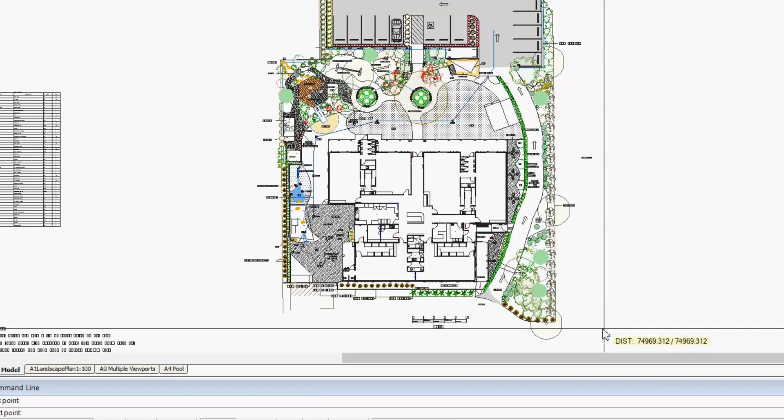I can use a tool called the distance tool, and in this case I can click at the top and come down towards the bottom here, and the cursor reads 74969. We work in the metric system in millimetres, so I have to shift a decimal point to say that's 75 metres, and in the imperial system we work with decimal feet. But everything's full size in the dimensions that people understand when constructing the landscape design, which in this case spreads all the way around the actual building.

So we're in what's called model space. In order to present the design to the client, we switch to another space, and these spaces are labelled on tabs at the bottom of the screen. They're called layout spaces, and you create them by going to Format and Layouts here.

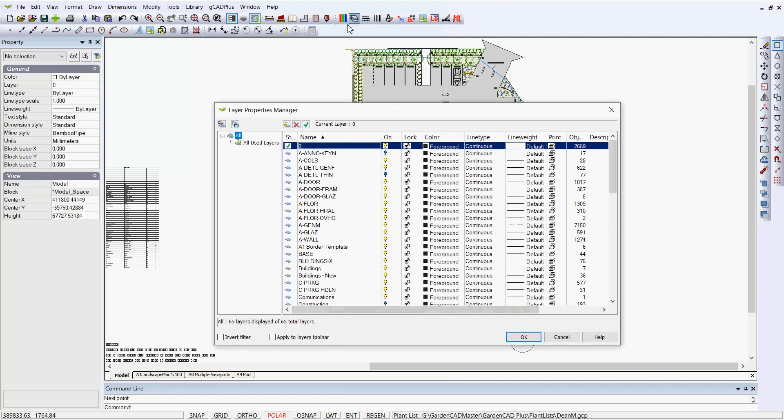We can also use lots of layers in the drawing. If I click on this little icon here, that shows you the list of layers. Various parts of the building, probably done by an architect, are on different layers.

Let's switch to what the client might see when you present this design. So I can go to a Layout tab I've labelled A0 multiple viewports. And here we are. This is more like the sort of thing you would present to the client.

So you do 90% or more of the work in that model space, but then you switch to a layout space to present your design to the client. Not only can we see, as we do here in the central zone, the design that we've just been working on in model space, we can also include images in this space just to indicate the type of species that are going to be used in the design.

Both in model space and in layout space, I can zoom in and out on the design using the wheel of the mouse. I can right-click and pick options like Zoom Extents or Zoom Previous. Let's Zoom Extents, and that takes me out and shows me the whole page.

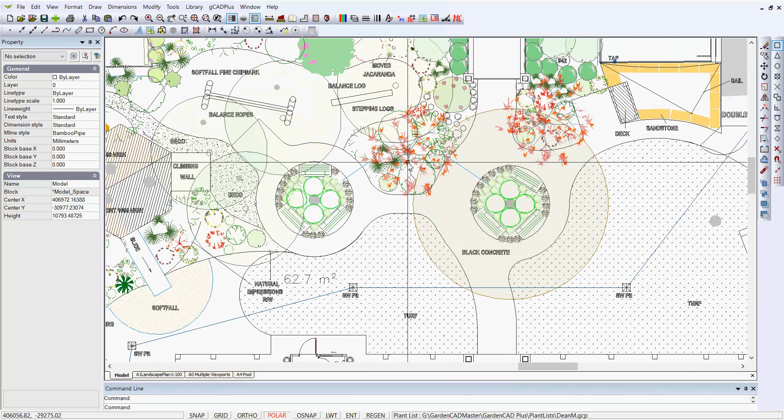At any time I want, I can switch back to the model by clicking on the tab. I can zoom in with the wheel of the mouse, and then I might want to pick one of these symbols here, and because I'm in model space, it's full size, I can pick it, and that's a symbol representing Kaffir.

Let's go back to the multiple viewports again, and different views of the design can be placed inside their own little floating viewports, as they're referred to. Here's a floating viewport of one part of the design. Here's the entrance space.

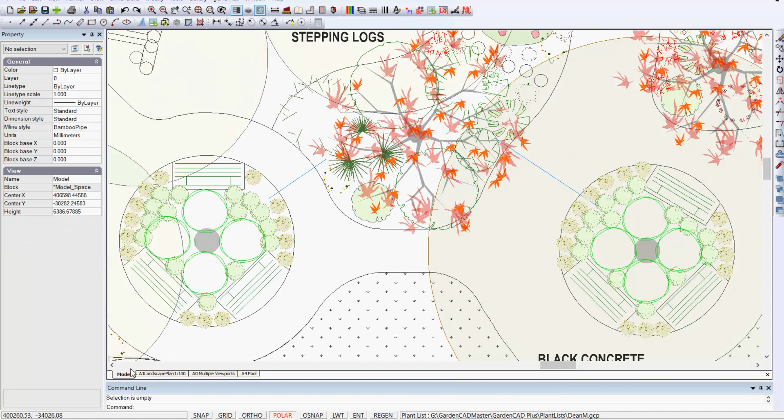So we switch when using a design like this, backwards and forwards from one space to another, with the majority of the work being done in the model space. Let me zoom Extents now in model space, and you'll see all sorts of other pieces of text and other information scattered around.

We don't print from here, but as you saw, we print from a layout sheet. I can right-click and zoom a window just to look at part of the plant schedule.

There's the schedule, which is automatically generated, and it contains the plant symbol, the botanical name, common name, code, and total. If I change the design by copying extra symbols, we can refresh the plant schedule, and that saves you the job of having to recalculate things.

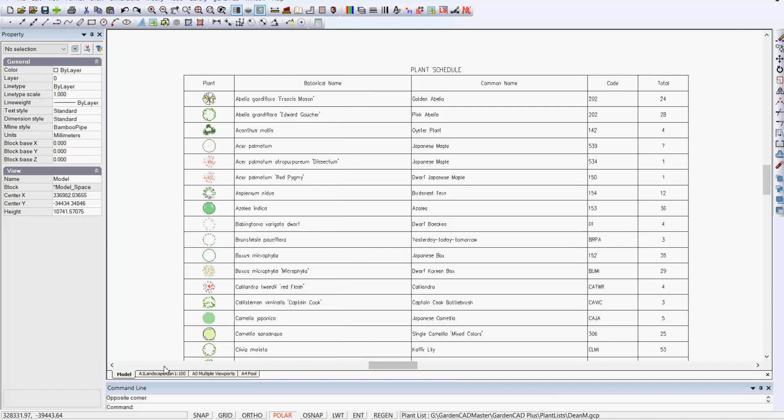If I need to print the design at a fixed scale, I can do that. Here's an A1 landscape plan at 1 to 100. If I pick the floating viewport here that sits outside a rectangle, you can see there's a view scale of 104, and I can type 100, hit enter, and make that yes.

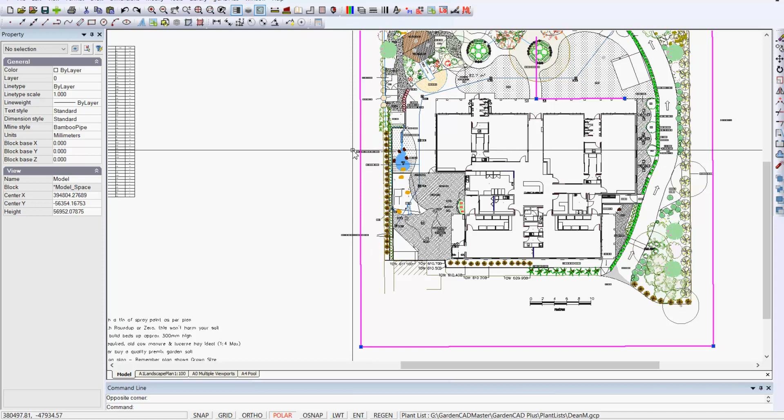So that floating viewport now sits quite nicely. If I want to just change it, notice how on the left things are not quite positioned the way we want. I just double click in that zone, that pulls up this magenta box, and that's the fixed 100 scale. So what I might want to do is just move it up and position it like so, and you'll see we are left with a little bit of text here that's hanging outside of the zone. I'll right click and display it on the layout.

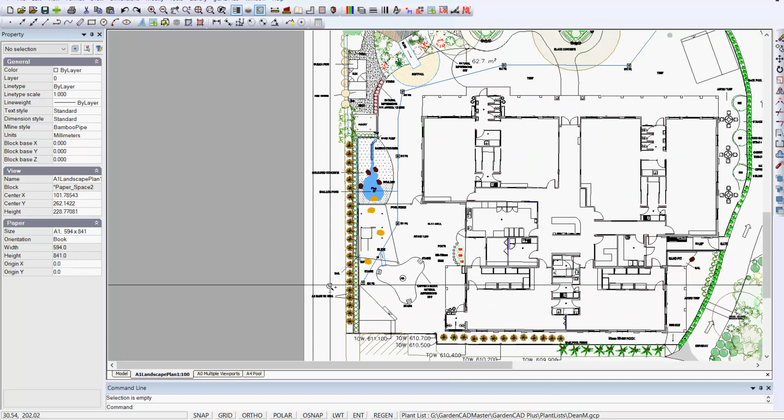And zoom extents again, so there's our 1 to 100. We need to do a little work by going back to the model and just moving these pieces of text around, and I can come in like so and go back to the plan. So there's a little bit of fiddling at this stage if your client does require a print that's exactly 1 to 100.

You might have noticed in the design that there's a pool and various activities. This is an area for children and children's entertainment. So here I'm looking at a single sheet, single layout on an A4 sheet, just showing that pool area in some detail. So I'm nearly ready to go to my client.

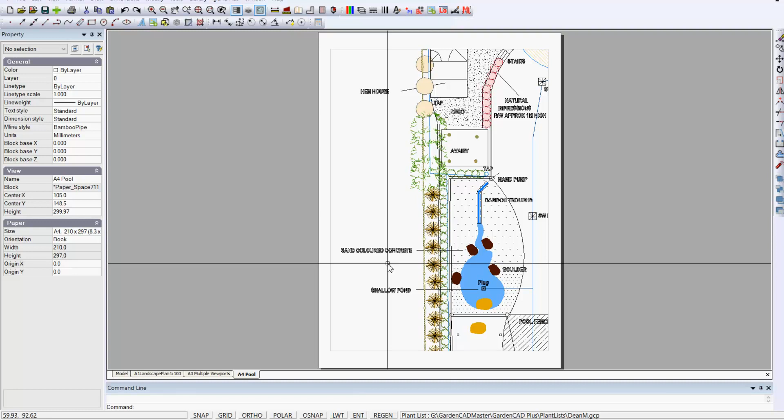Depending on my client's particular needs, I have to do a little bit of work on adjusting the height of some of the text in there to make sure that in this particular zone, this particular layout, things look the way I want. This entity here is a rectangle that I could make just a little larger and position it like so.

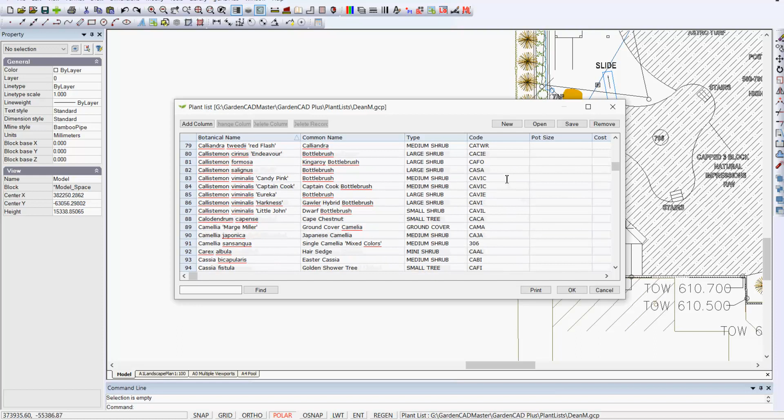The key issue, I think, for a landscape designer is that if I pick a symbol, every symbol in the design, apart from a few that I just want to show in a moment, has been tagged in a plant database file. If I go to edit the plant list, there's the attached plant database file that's associated with this drawing, as is a 4-letter code associated with each species.

I've got all sorts of tools to help me. Let me zoom extents and then zoom a window around the design. All sorts of tools to make sure I don't make errors. We can say GCAD Plus schedules and lists, show me all the symbols with names.

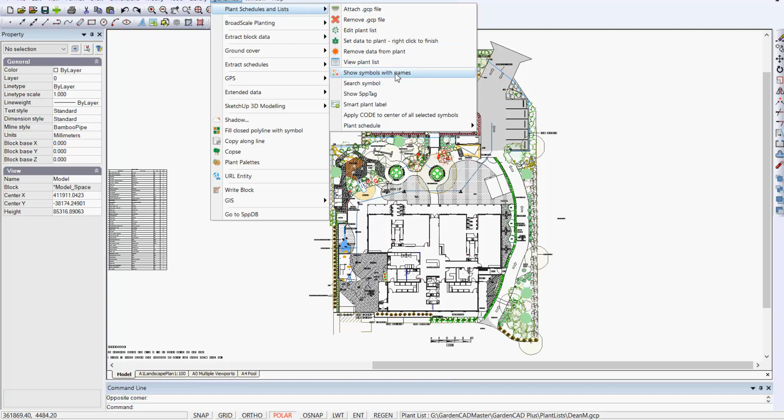So I mentioned that there were a few symbols that haven't yet been tagged. So if I pick this one, if I pick that one, there is no associated name. So I need to use tools in that drop-down menu and pick that symbol and associate it with one of the entries, one of the records in the plant data file.

So I hope that gives you a reasonable introduction to how you might go about doing landscape design work. It's a relatively complex site, and a lot of work has gone into the creation of this design. It's a commercial and professional development.